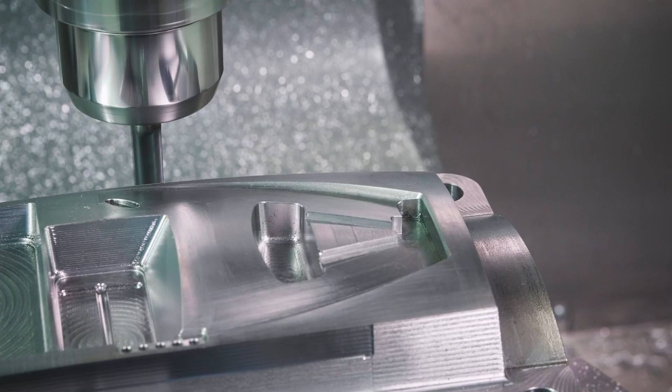Every shop strives to create perfect parts every time, but even the best in the business will have an accident now and again. In the case of our example part, this gouge was created by a retract height that wasn't properly set. Since the programmer didn't review the toolpaths and verify or machine simulation first, they weren't able to find this issue before it happened at the machine.

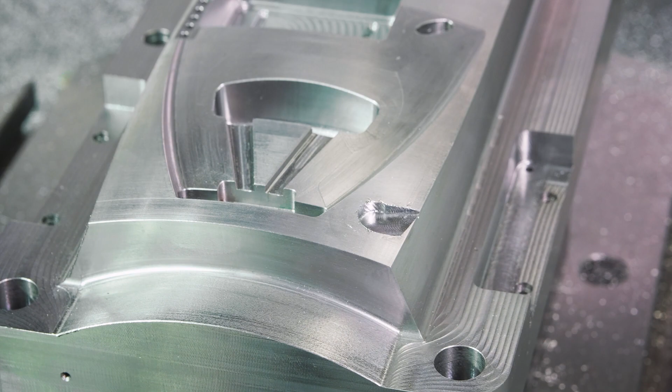When this sort of thing happens, it's common practice in many industries to send the damaged part out and have the affected area welded. Once the weld repair is complete, the part needs to be set back up in the machine so the weld can be remachined, returning the part to specification. The combination of the tools in Mastercam and the functionalities of the Haas next-gen control make this process fast and easy.

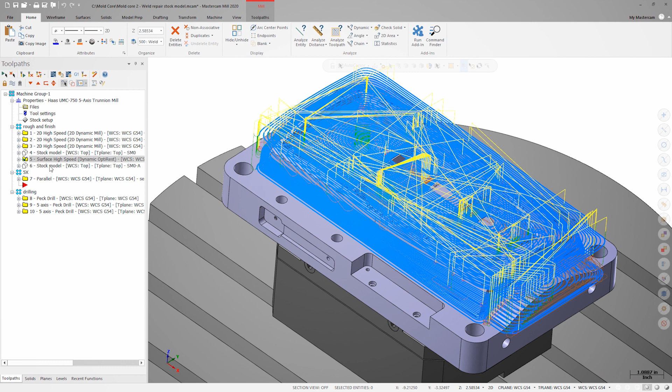Let's start by looking at the original file that was used to machine this part. Inside the file, you'll notice that there are a few roughing operations that are immediately followed by stock models. This serves two purposes. First, the stock model can be referenced by toolpaths. This means that Mastercam will create a rest machining operation that does not contain any additional or unneeded tool motion, since the toolpath knows what stock is left to cut.

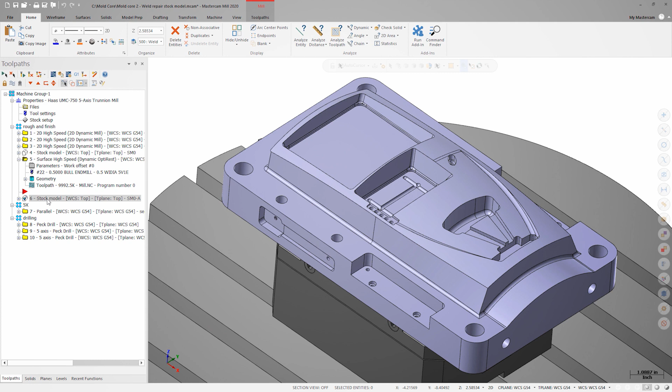Secondly, the programmer can toggle these stock models on and off, which is a helpful way to visualize the state of the part. This can help inform decisions that are made about what toolpaths could or should be used to continue processing the part. After those roughing toolpaths is a multi-axis parallel toolpath. This toolpath finishes the top face of the part, which happens to be where the repair is.

For the remachining of this repair to blend in the best, it's a good idea to utilize the same toolpath motion. In this case, we're going to end up making a duplicate of the original parallel toolpath. Obviously, we don't want to just rerun the exact same operation, since we don't need to recut the entire face. Instead, we'll isolate the area of the part that needs to be machined so the toolpath can be as efficient as possible.

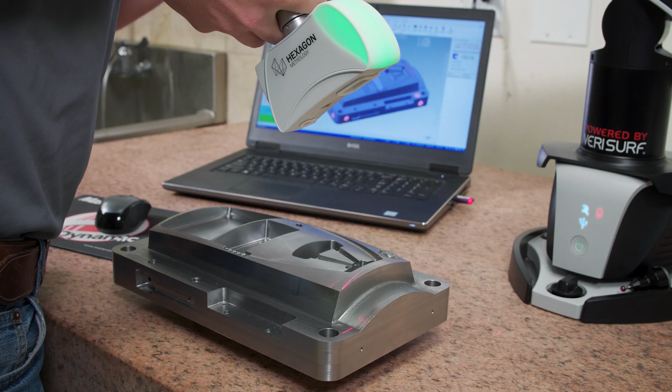Ideally, you would have access to tools like a Master3DGage with the optional scanning head. This would allow you to scan the part after it was repaired and use the resulting mesh to create drive surfaces that perfectly match the area to be machined. Of course, that's not always an option.

For this example, we'll simply create some geometry in Mastercam that will allow us to isolate the welded area. What we've done is create a simple spline that describes the outside boundary of the area we need to remachine. This boundary isn't critically accurate, but it should be enough for a simple repair. Instead of creating a new toolpath from scratch, we'll create a group below all our other toolpaths, then make a duplicate of the parallel toolpath we looked at earlier.

Since all the original toolpaths are linked to the existing model, if we make any changes to this model, it may break links to those toolpaths. Instead, we'll make a duplicate of the model onto a new level and use that for our repair work.

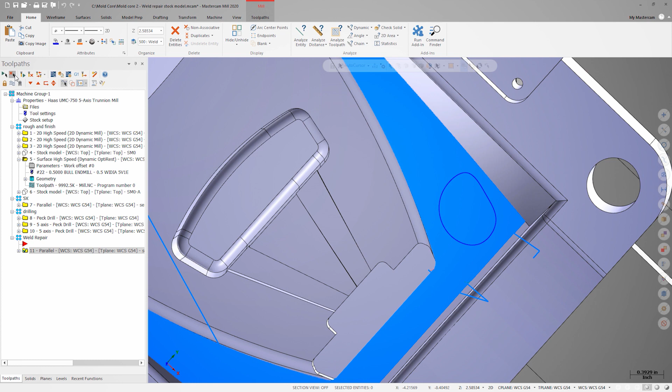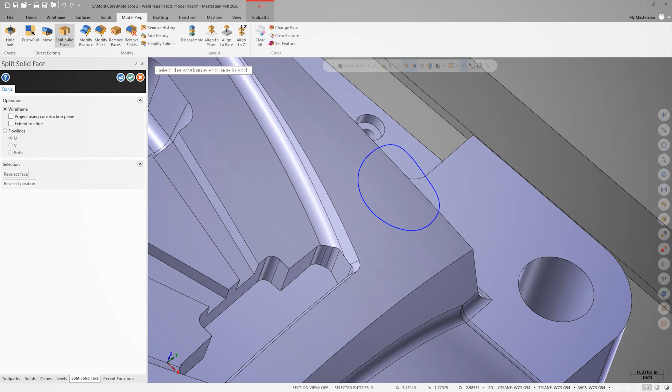Once our duplicate model is created, we'll go to the Model Prep tab and launch Split Solid Face. When prompted, we'll pick the top face of the model and spline. The spline is projected down onto the face and used as a boundary to split the solid face with. This means we now have a separate face that perfectly describes the area we need to remachine.

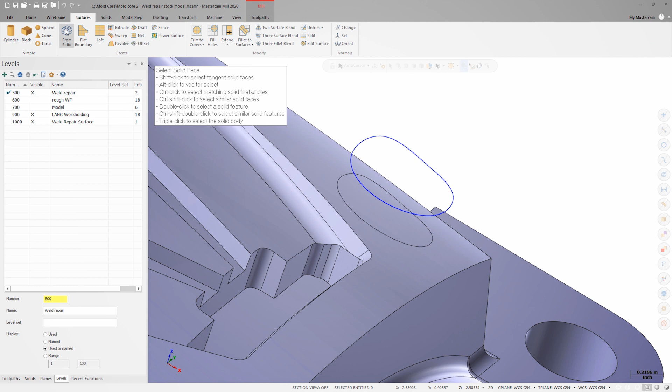Now that we have that face isolated, we're going to create a stock model from it that can be used for our rest machining. To do this, let's start by creating a surface from this face by using the Surface from Solid command.

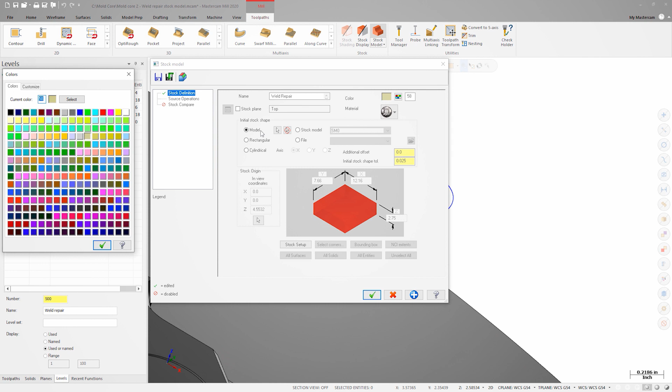Next, we'll launch Stock Model from the Toolpath tab. We'll name the stock model and pick the surface as the initial stock shape. Next, we'll change the stock model color to make it easier to see in the part file. Lastly, we'll leverage the additional offset feature.

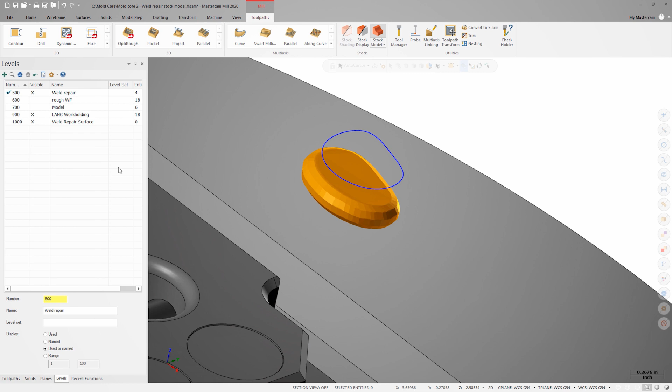To find our offset value, we'll take measurements of the height of the weld bead, making sure that we have an accurate measurement at its highest point. Once we enter that value and close stock model, we can see that the new weld repair stock is displayed. It can be toggled on and off by pressing T.

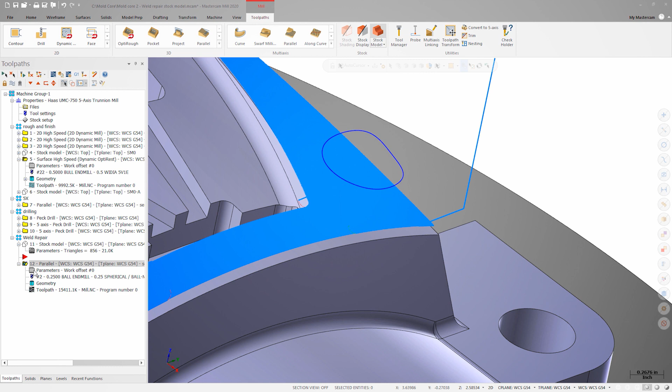Now that we have a stock model for the weld repair, it's time to make some adjustments to the parallel toolpath to make sure that it's using this stock model as the reference for what to cut. First, let's adjust the drive surface offset to 2 thousandths. This will leave a little material on the part, which is always a good idea when remachining. It allows you the opportunity to slowly adjust the toolpath to sneak up on a good blend with the existing part. On the stock page, we'll enable stock and choose the weld repair stock model as the source.

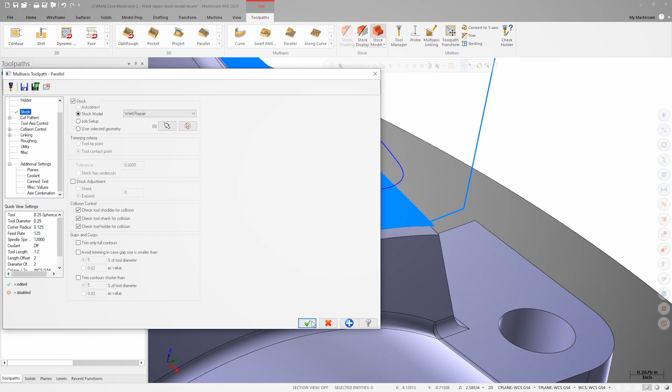Because this part is going to need to be remounted in the machine, we're going to need to be able to locate it during our part setup. Our original G54 plane might not be ideal for this, so we'll create a new plane called Rework G55 that will allow us to pick up the part location from one of the hole features on the part. We also want to make sure we set this new plane as our WCS, tool, and construction planes.

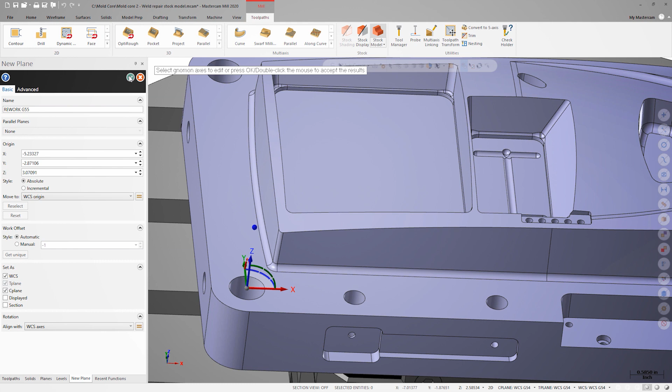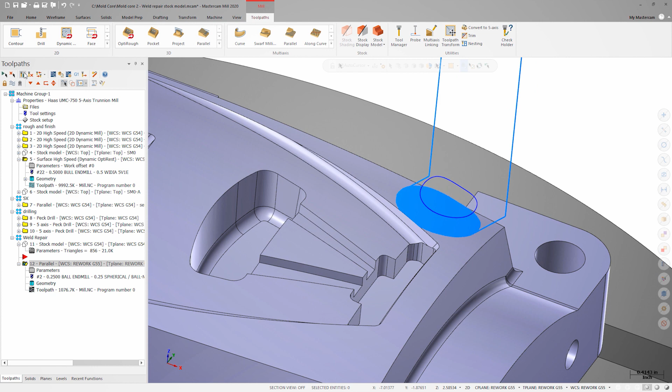We can now regenerate the toolpath. Note how the toolpath is limited to the area we need to cut, and if we turn on the display of the original version of the parallel toolpath, the stepovers line up exactly.

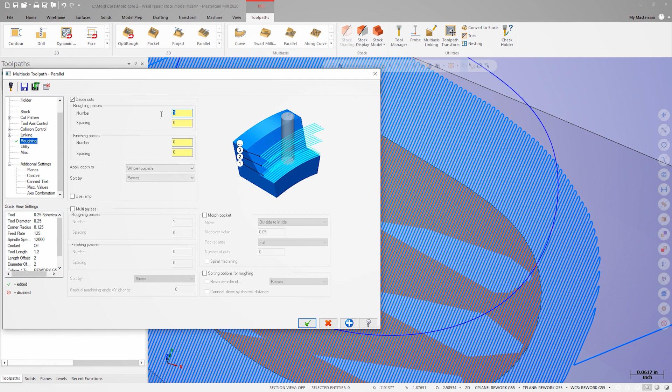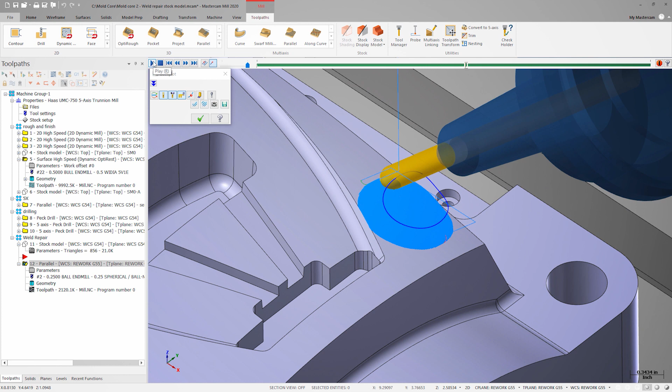This weld repair might be a little too much stock to take off in one pass. Let's go back into the parameters, and on the roughing tab, enable depth cuts. We'll set the number of cuts to 2 with a spacing of 20 thousandths. With the toolpath regenerated a second time, we can review it in backplot. The tool does not look overly engaged in the material and should be ready to go. Let's post out the code and get the part set back up in the machine.

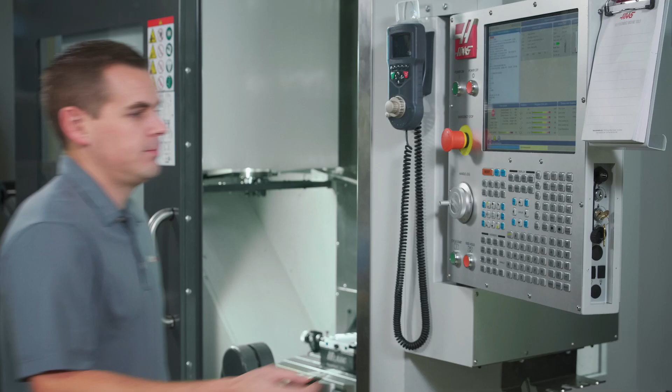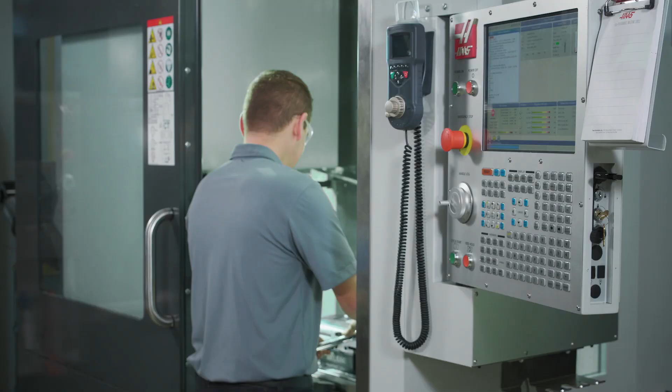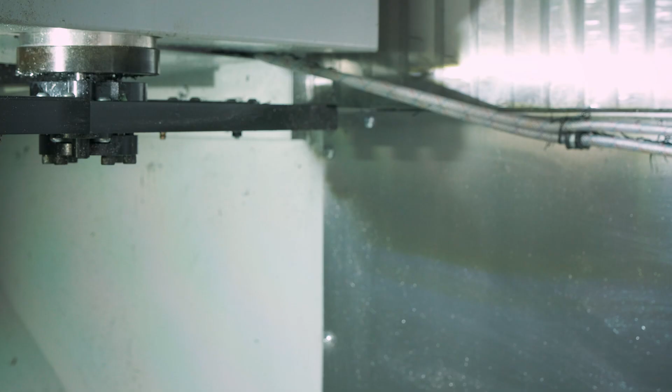Let's start by loading the part back in the machine. Next, we'll manually call up tool 41, which is our probe. We'll go into MDI mode, type T41, and press either ATC reverse or ATC forward. Once the probe is in the spindle, we'll jog the probe over and down inside the approximate center of the locating bore that we chose as our G55 location in Mastercam.

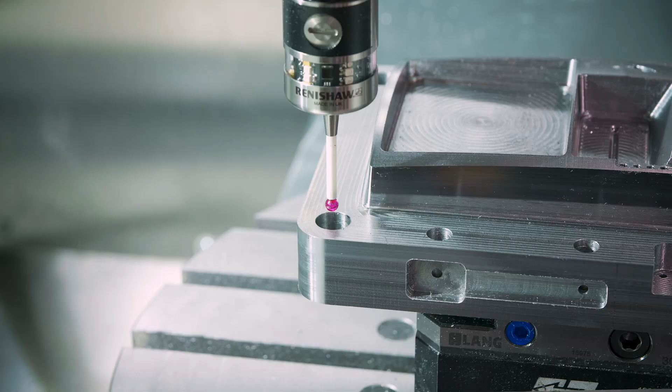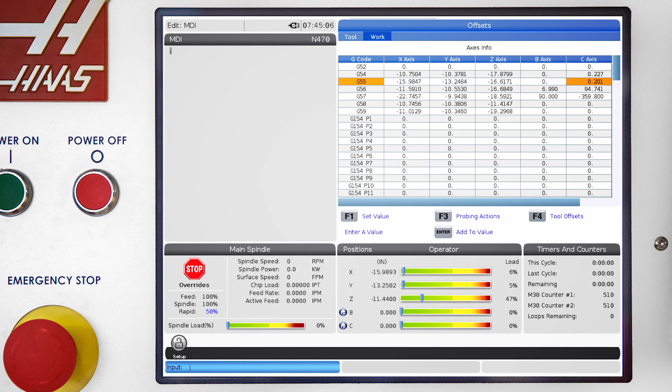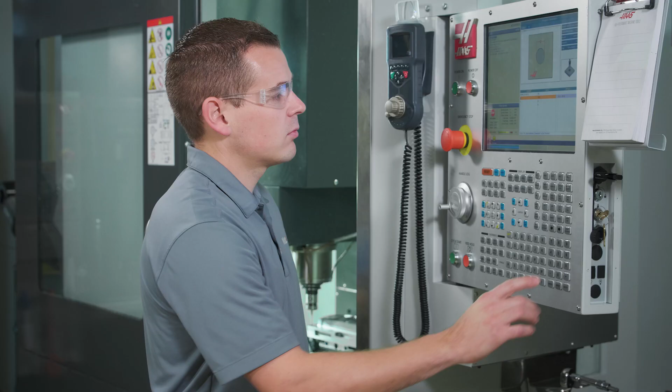Now we'll press the offset button and navigate to the work tab. Highlight G55 and press F3 for probing actions. In this case, we can use the bore cycle. After pressing enter, we'll enter the bore diameter of 0.625. That will populate a macro that I can run in MDI by pressing cycle start.

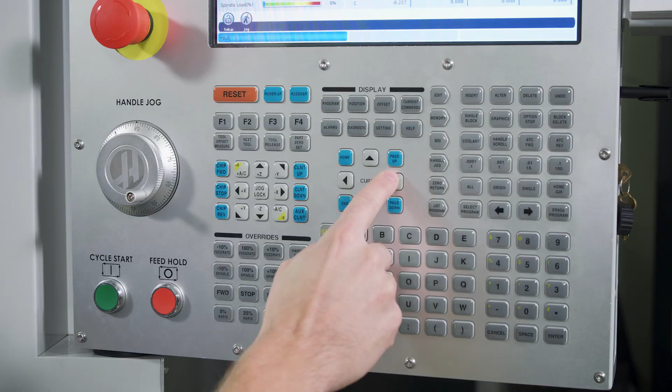This automatically populates the G55 work offset with the correct X and Y values, but we still need to set our Z. We'll do this by using the single surface routine. Picking up a part location doesn't get much easier than that. Now all that's left to do is load the program and machine the part.

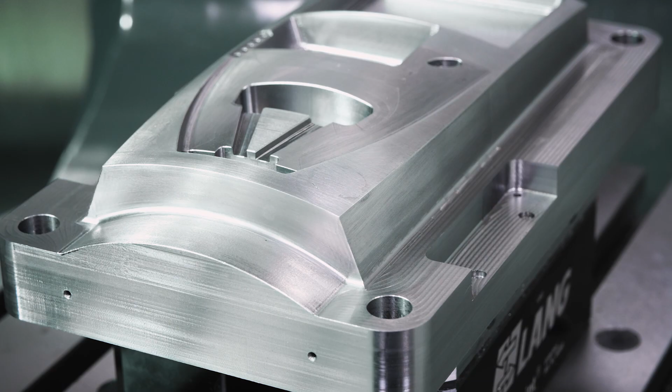We hope you've enjoyed this quick look into setting up a remachining toolpath in Mastercam and using the wireless intuitive probing system in your Haas Next Gen control. And remember, this process isn't just for multi-axis machines. This same process can be used on any 3D toolpath as well.